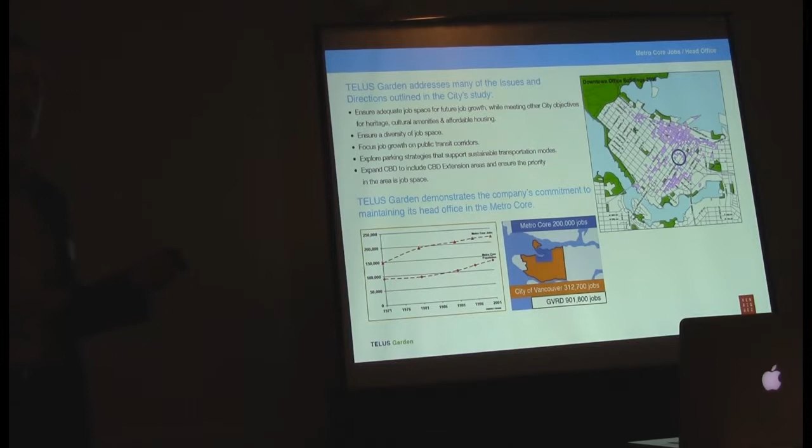This played perfectly into what was going on in the City of Vancouver at the time. The city, with all the residential development, was essentially becoming a resort town. If the scenario played on and we continued to develop residential condominiums downtown, the scenario could possibly be that we all live downtown and go to the suburbs to work. So the city recognized this, and they started to draft policies to encourage office building. There's been a lot of office building in the last little while — before that, I think the last office tower was built like 12 or 15 years earlier. So there was a wonderful opportunity.

On top of that, Telus kind of shared in the same vision that Ian had. Obviously, we're building right now, but their vision, when they recognized the importance of this site — it's an incredibly important site in the city of Vancouver on Georgia Street.

They recognized that having the two parkades and the existing Telus building was really a hole in the fabric of Vancouver. They were so excited about this that they decided not to continue their plans to move their corporate offices to Toronto, even though they'd just built a new tower in Toronto.

They decided to keep the headquarters in Vancouver because of this development, which is great because we've lost so many corporate headquarters to Calgary, Montreal, and Toronto. This was the perfect storm for the city: an underdeveloped site, corporate offices, and more office space, so the city was incredibly receptive to our proposals. A lot of things we submitted we didn't expect to get away with, and we did, just because the city was so receptive.

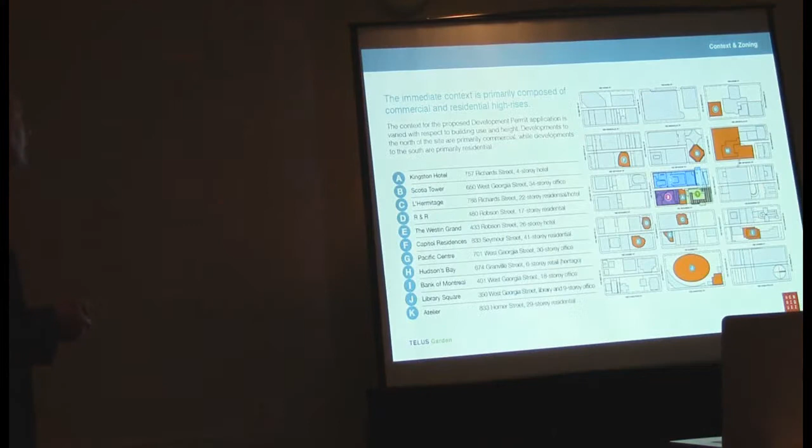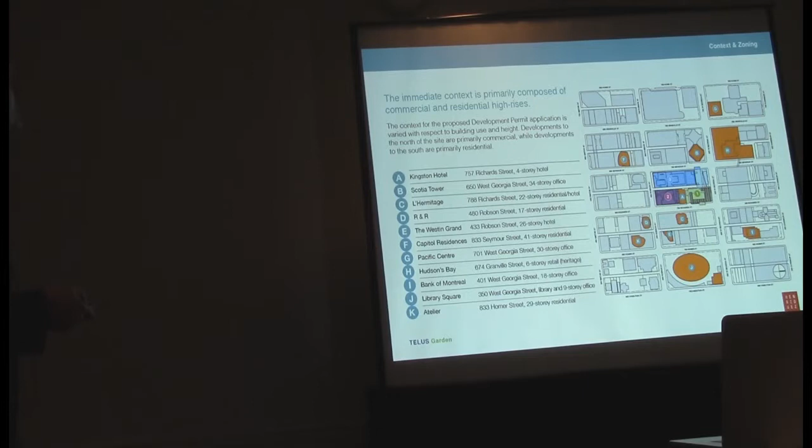Everybody knows the site, it's on Georgia Street, bounded by Seymour to the west, Richards to the east, and Robson Street to the south. It's surrounded by commercial to the northwest, the Hudson Bay, Scotia Tower, and residential development to the east. We've got the Kingston Hotel in the middle of all this — apparently beer sales have gone up during construction — and then the Hermitage opposite that, and of course the library.

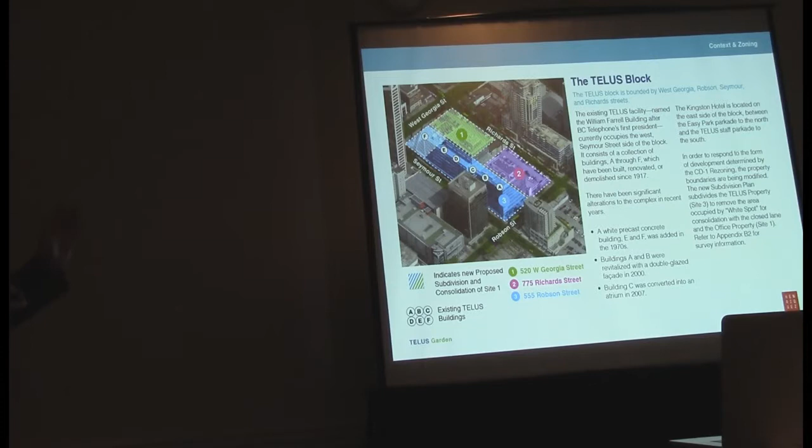The Telus site itself was what they initially wanted to develop, but Ian saw a bigger vision to develop the entire site, including the Kingston Hotel location. This is where the residential tower, the office tower, and the existing Telus building are located, and where that little sunken garden was, where I guess White Spot used to be. A lot of people are upset White Spot is gone, and I should break it to you, they're not coming back to Telus Garden — apparently Glowbal isn't quite the same.

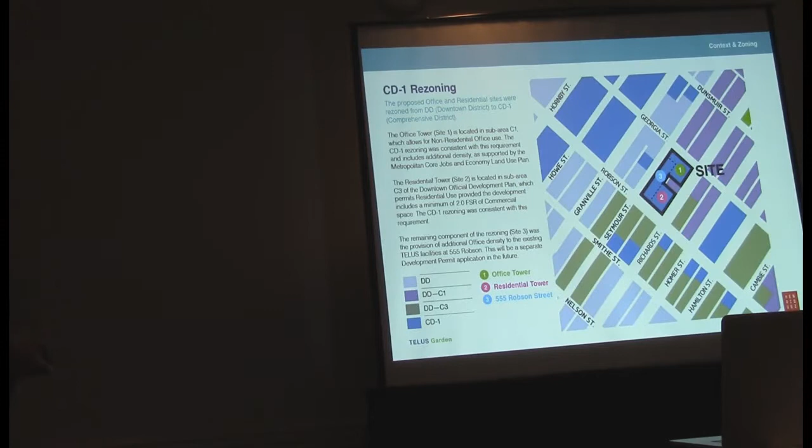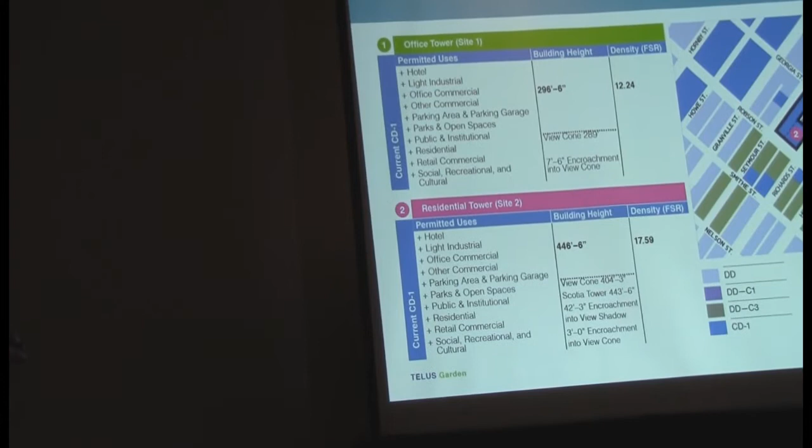On zoning, we were able to rezone this property from C1 for the office and C3 for the residential to a single CD-1, primarily to get some additional density. Like good architects for our clients, we got a density of 12.24 for the office tower and 17.59 for the residential tower, which is quite a bit of land lift. I think we did a very good job with that density.

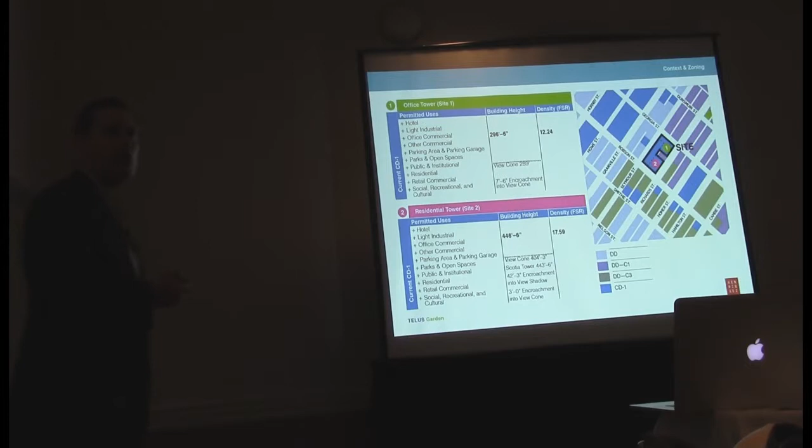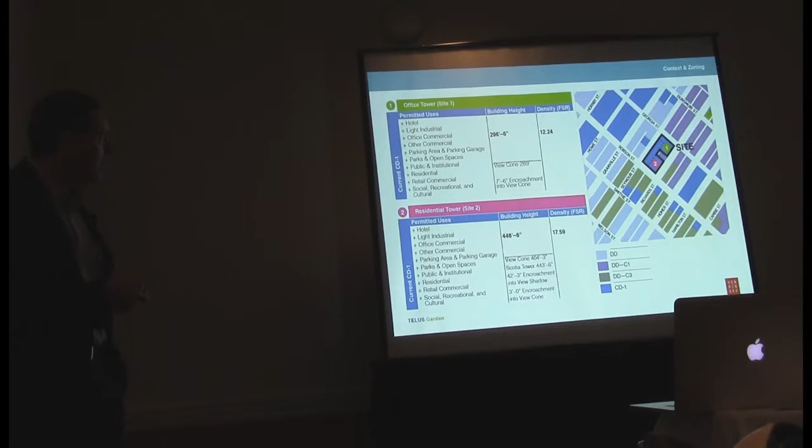The interesting story, though, isn't so much about density, because I think density fits well — it's more about the height. The office tower is capped at 300 feet, and the residential building height is about 450 feet. Under the discretion of the Director of Planning, you could build up to 450 or 500 feet in the downtown core on these sites.

But we were capped by what the city calls view cones. In 1989, City Council enacted 27 view cones, primarily from False Creek looking north over the city, to preserve views of the North Shore. These corridors cut through the building and through the city, and they control development.

With respect to the office building, view cone 9.1 — one I particularly hate of the 27 — you can see it here. There's an abstraction trying to maintain a view from Cambie Street, almost opposite City Hall, so that at that particular spot those mountain views are maintained. They're dynamic, because as you drive, you lose that view, but at that particular point it's important.

What it did was cut short a tower that could have possibly been 40 stories. It was a little frustrating because we had this corporate commitment, and we could have had a building twice the size, but we were cut halfway down because of the view cones. You can see view cone 9.1 cuts right through the center of our site, right here.

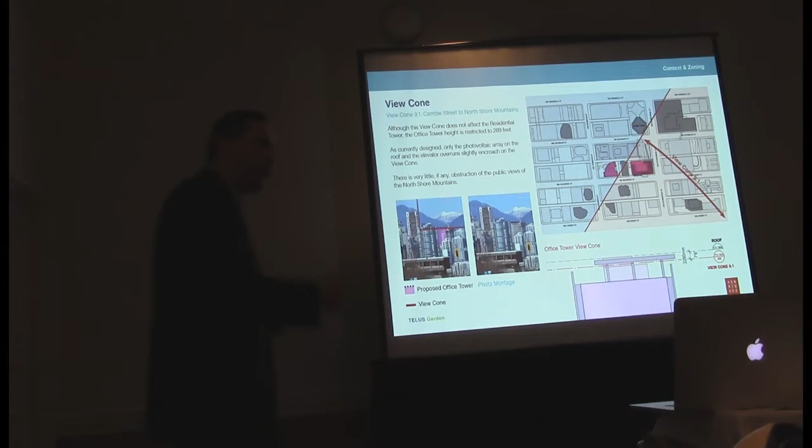You can't see it at all. We were able to actually encroach into the view cone. There is some leniency from the City of Vancouver. For Woodwards, for the W building, we were able to get a 7-foot encroachment, which was huge then. Here we got a 7'6" encroachment, so we gained 6 inches. This is huge. By the end of my career, if I can get to 7'11", I'm going to retire a happy man.

The other view cone, another one I don't like, is 9.21. You can see what it captures, the mountain view here. You can see it here cutting through our site. This is 9.1, and this is 9.21 this way.

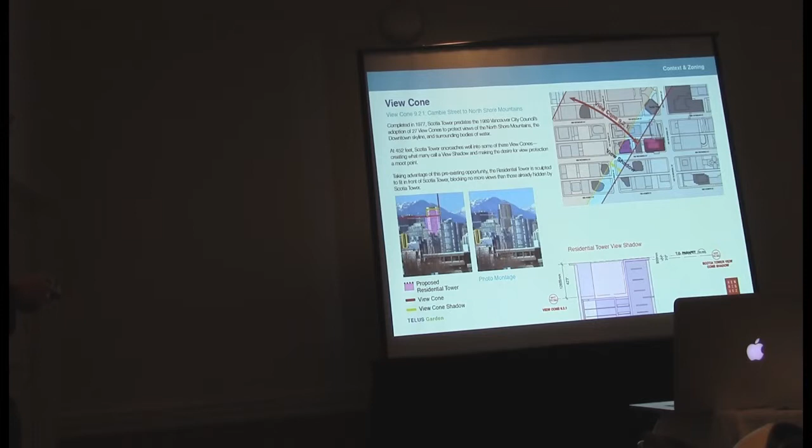The interesting thing here, and the reason why we were able to build the residential tower so much higher than the office tower, was the Scotia Tower. Thank God for the Scotia Tower. It was designed and built and completed in 1977, which predates the view cones that were enacted by council in 1989.

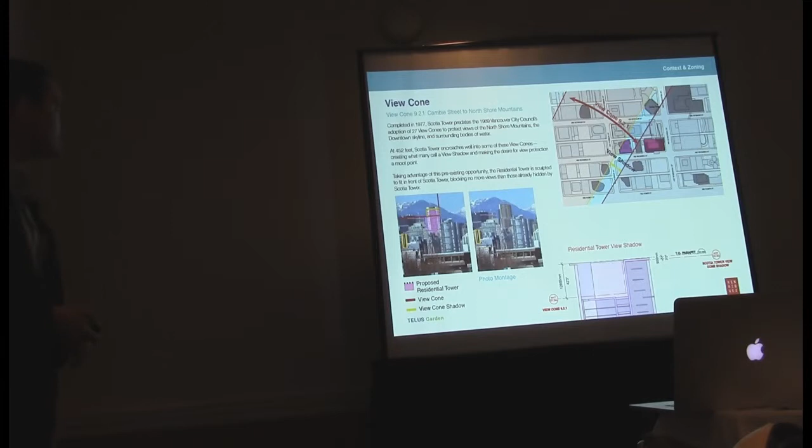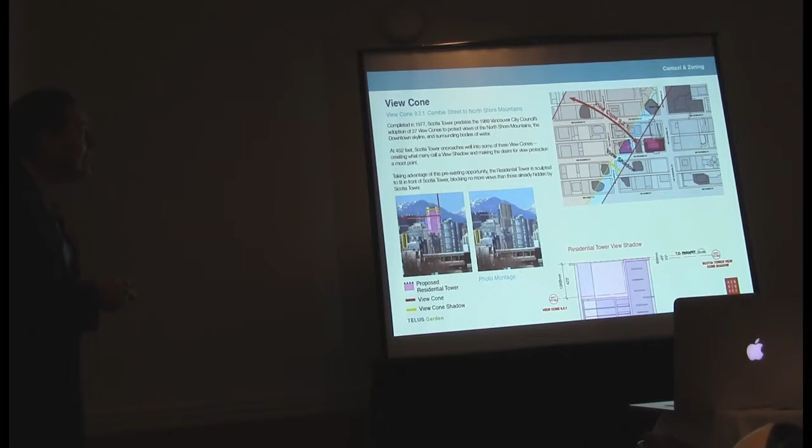We argued successfully that in no time soon would they tear down the Scotia Tower, so we argued, well, why don't we build in front of it? Seems logical, and the city accepted that. You can see it here - we're building a portion of our building that steps into the view cone, so we've cut the building off because of that, and sculpted the top of the building because of it. We were able to get a view cone encroachment of about 3 feet on this, not as successful as the other one.

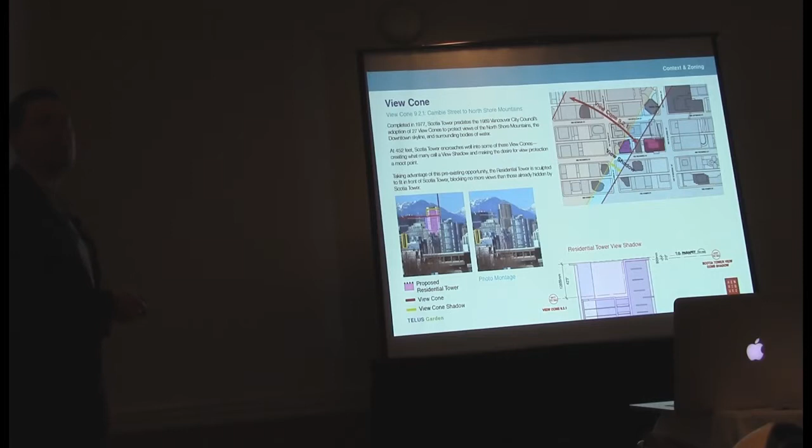Mixed use program. This big, larger vision of developing this site allowed us to actually do a number of uses on the site and really kind of rebuild this part of the city.

This is an abstraction of the residential tower and the office tower on West Georgia. The yellow is commercial, the purple is the existing Telus building. The interesting thing about the existing Telus building was, at one point, that was completely full of ladies plugging telephone lines.

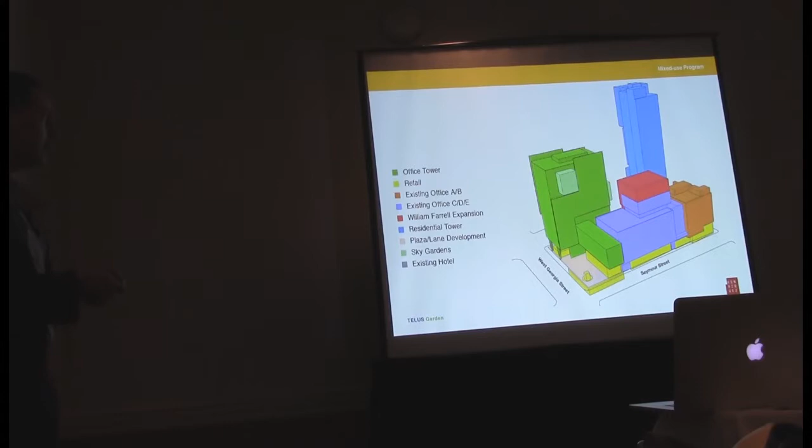Now, 300-400 people plugging things is replaced by a little computer in a closet. They've expanded that network, and it's quite huge, and there's an incredible amount of electronics now. So they've actually displaced a lot of the people who were in there. At one point, we were actually working on a data center to go on top.

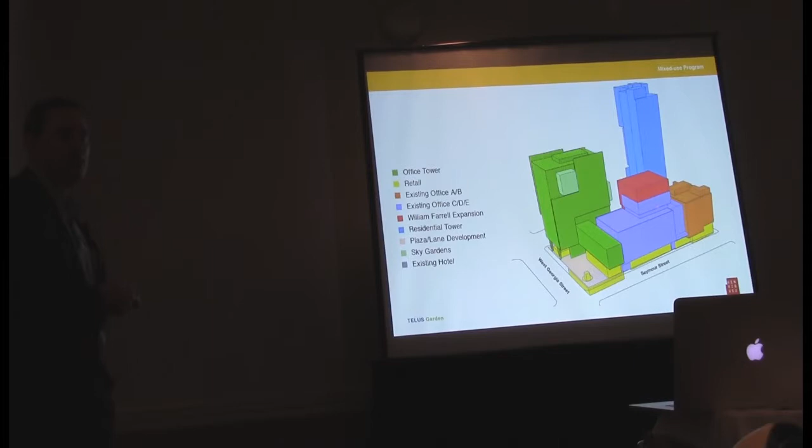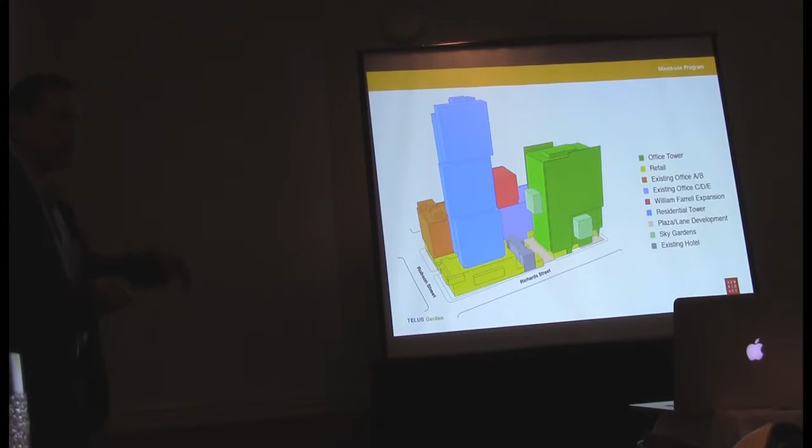Residential - you can see 555 Robson there, the data center. There's a lane outlet here. We actually closed the lane off and bought it from the city, offering this easement through instead of an encroachment. So we closed the lane off, and this is the office tower there.

Form of development. Unlike the video, which had the architect sit down in one sitting and sketch the entire idea, it's a little more complicated than that. These diagrams basically illustrate all the different forces affecting the design of a building. I'll go through them.

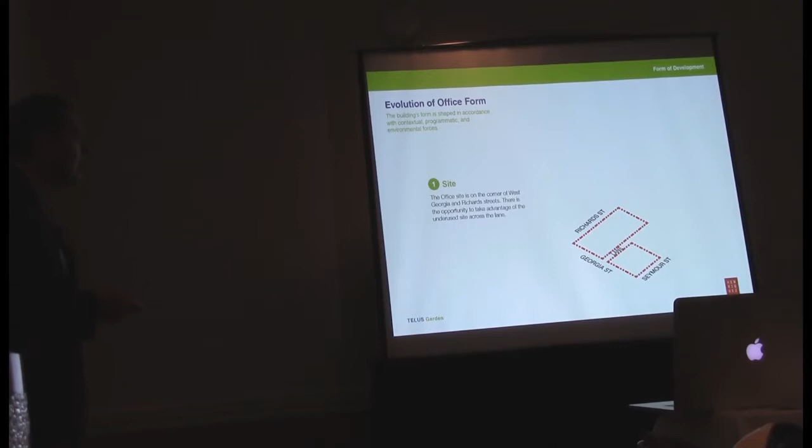Starting with the office tower and the evolution of form here, we start with the site. This was the city parkade, separated by a lane. This was that little sunken garden, that commercial area, where the white spot was. So we started with that, and we took the amount of square footage that the developer wanted in order to make this a successful development.

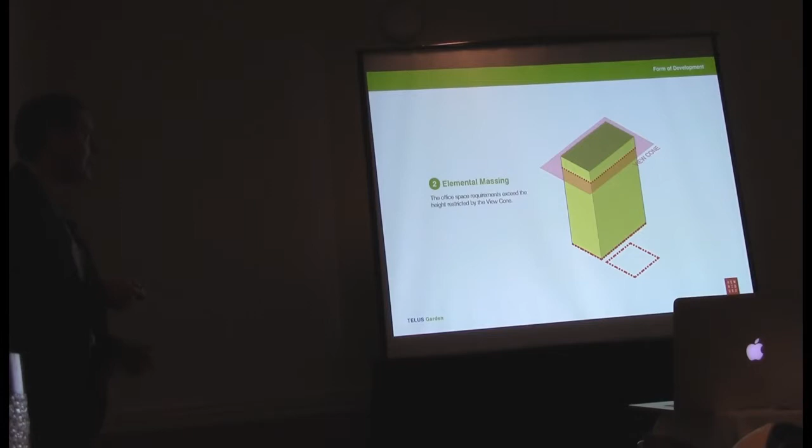You can see there we fitted it onto the site, and once again that pesky view cone cut us off, so this was not financially viable. We had to figure out what to do with this extra density, and it seemed logical that perhaps we take that density and transfer it to the other side. But we're left with a shorter tower, and in some respects we've got this orphaned piece of density - frankly, a little building there on Vancouver's most ceremonial street wasn't the right solution.

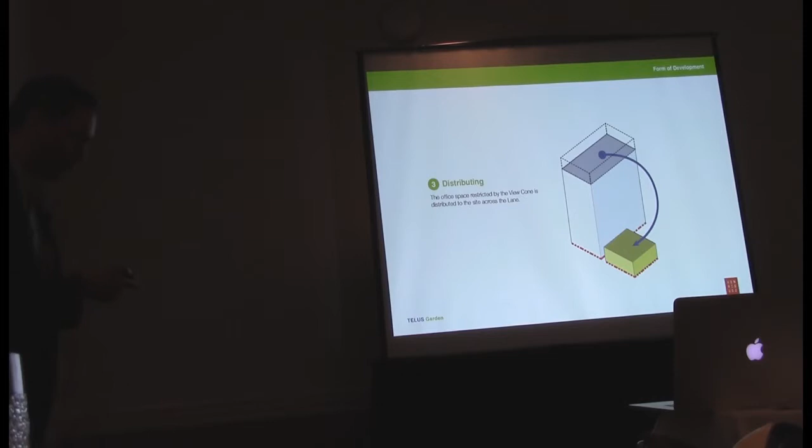So we said, well, what can we do now? Why don't we bridge across, pull this thing up and through, bridge over the lane. We can connect the new Telus building with the old Telus building, so bridge the two.

Because the density was greater, we proposed to cantilever since we were running out of room. We proposed going over the property line, arguing that the view cones they wanted us to respect actually cut into the building. This is a corporate head office, and it should have more presence in the city of Vancouver. So we proposed that this presence would be seen on the street rather than up in the skyline. The city actually accepted that rationale—they were very receptive to this development.

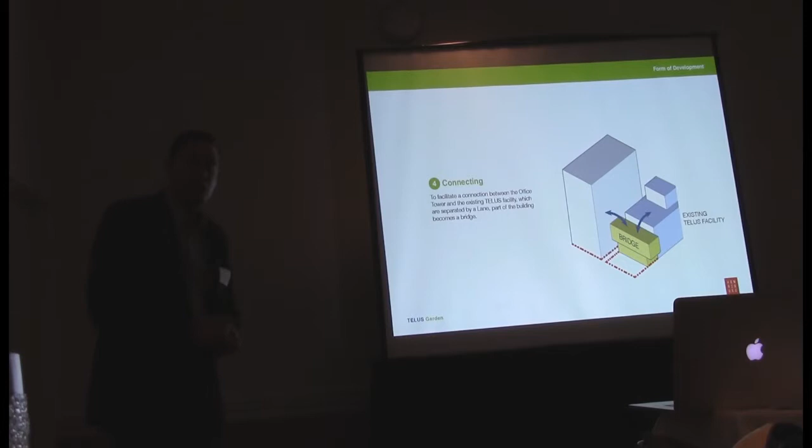We were able to cantilever over the street by 25 feet, on Seymour and on Richards. So you'll be able to drive your car underneath this building. This is nothing new—think about Erickson's courthouses, there are developments not only in Vancouver that have done this. It's not new, but for the city to accept this now was revolutionary for us. We still can't believe it, we're still pinching ourselves that they would allow us to do this. It's pretty radical for the city of Vancouver.

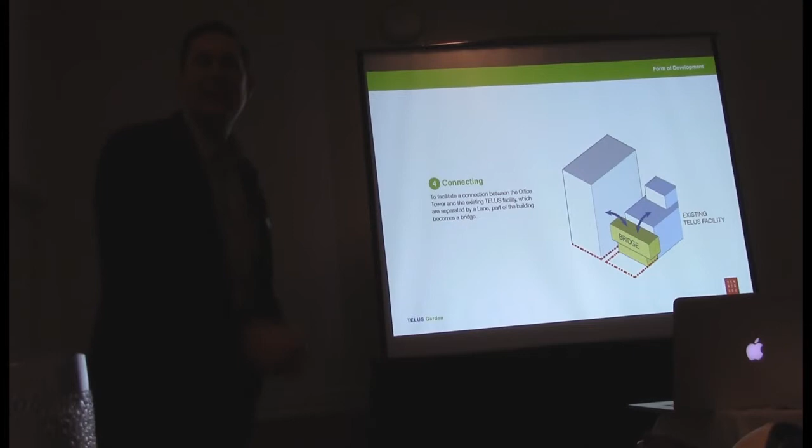Every time we go back and talk to the planners now, we come into their offices and every new development being submitted is asking to cantilever over the property line. Every development—they just hate us up there.

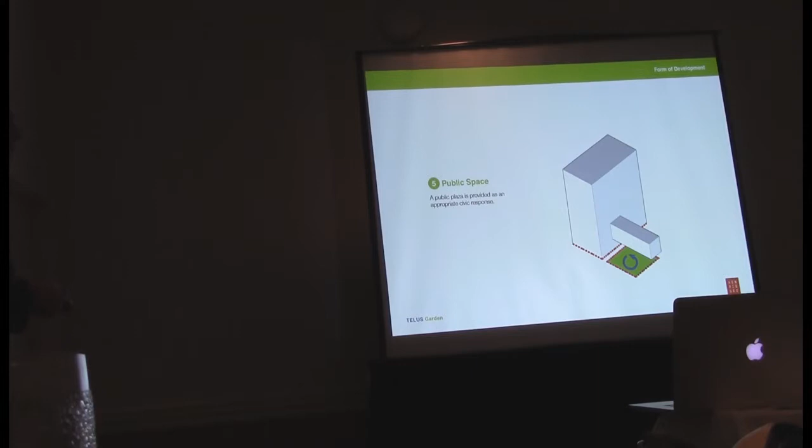By pulling this bridge up, we're actually allowed to have a plaza there that we can use for more ceremonial spaces because of Georgia Street. The other thing is we had this notion of having public, semi-public spaces occupying all the roofs, which is a crazy notion for an office tower, that people can actually go out and utilize roof space.

Even though in emergencies you can drive through the lane—there are some bollards that are removable—we needed a gesture to link this orphan site with the other. We came up with the idea of a pavilion with an arch, with the arch at the highest point where the lane is so an emergency vehicle can get through. On the plaza side, that becomes a covered area—it does rain in Vancouver, so we thought that was a good idea. Then it transfers into the lobby of the Telus building, almost a seamless integration of inside and outside.

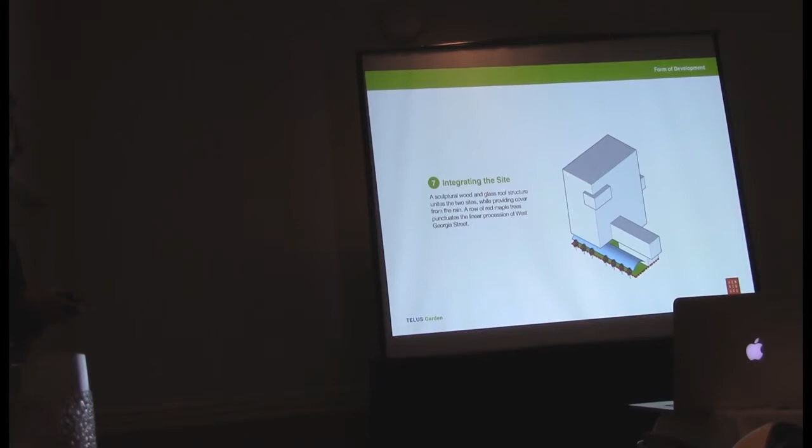We came up with this notion, still working on it, of integrating the entire block. One of the more interesting things is this lane—I always say it's the prettiest lane in Vancouver. Kind of a weird thing to say, but it has no power poles, because all the copper in the province comes into the existing Telus building here, and it comes down the lane.

I don't know if anybody drove by the site and saw that big bridge holding up something—that was all the copper in the province coming into the site. They constructed it and put it onto a steel bridge, holding it in the air because it was once running down the lane. Literally, that was all the copper going into the mainframe at Telus.

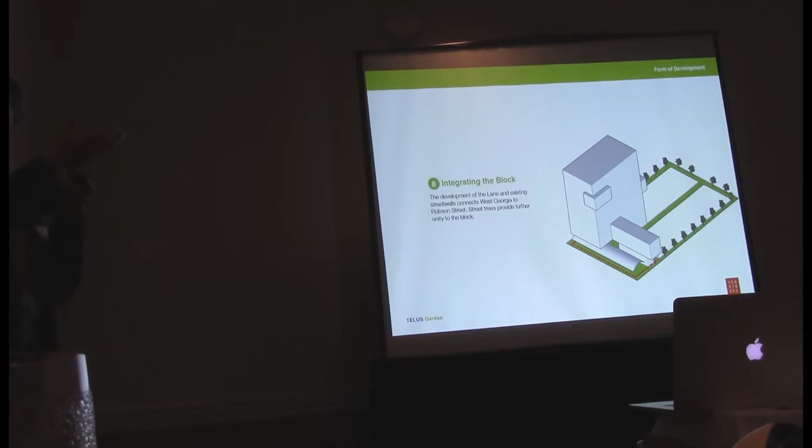That was all military, all police, CSIS—all running through there. There were guys on call 24/7 because if the bridge deflected a little, the lines would go down, and crews would descend upon that. Thank God, it made for a lot of sleepless nights for risk assessors at Telus. Nothing happened—we held it up in the air, built underneath it, and then put it back again. So thank God that was safe.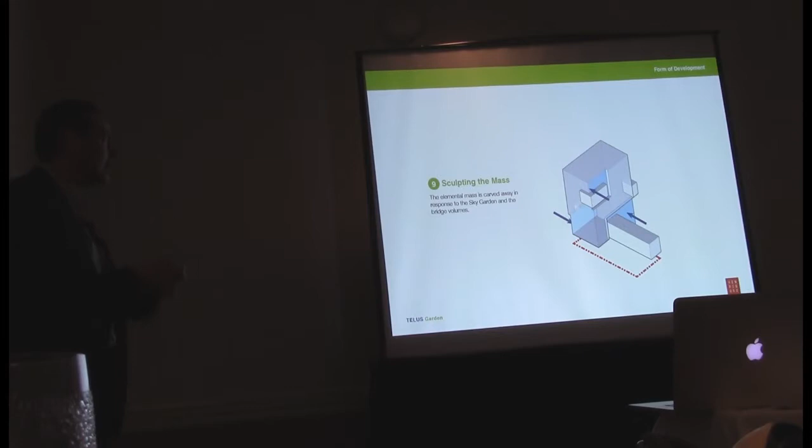Then we had the simple mass. We started to sculpt it a little by pushing and pulling, creating what we call sky gardens, which animate the facade. Then we start to articulate the skins—you'll see this a bit later. That's it there, a simplified schematic rendering: the sky balconies, the photovoltaics at the top, the skin I was talking about, the bar, the pass-through, the pavilion, the lobby, a water feature, a sunken garden here, a water feature there.

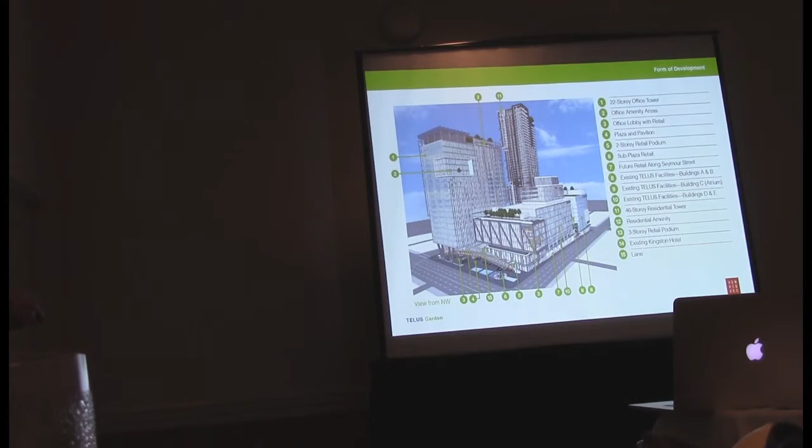Kind of really interesting—same thing with the evolution of residential form. It started, like all good projects, with a site. This is on Richards and Robson.

We essentially started with a pretty typical typology in Vancouver, which is a podium, tower on a podium, and we moved it away from Robson Street because that's our pedestrian street, and we didn't want a huge 47-story tower hovering over it. So we moved it back.

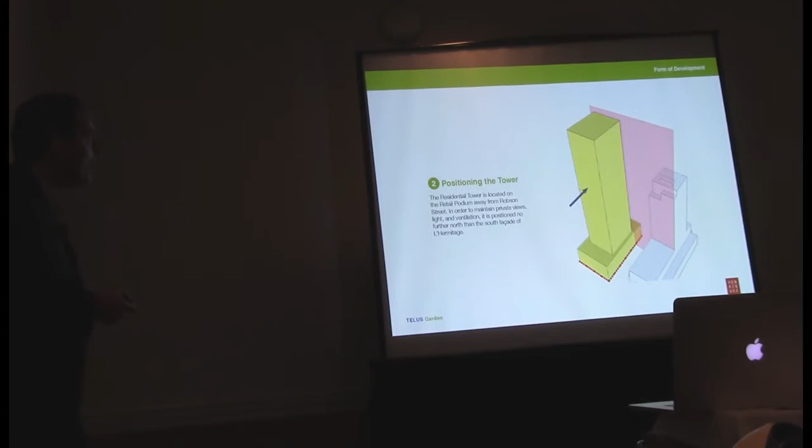We moved it back to an arbitrary line, the edge of the Hermitage, because we wanted to maintain the private views of the people living there. Then there's the view cone, 9.21. You can see the view shadow for the Scotia Tower, and we had to cut a portion of the building, which sculpted the top.

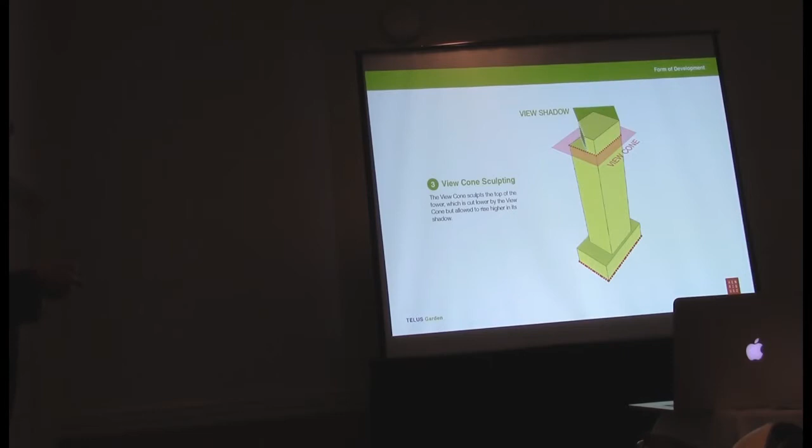Then, since it's quite a big tower, we actually broke it into 3 parts. We had a west bar and an east bar, and we shifted those, creating this interstitial space.

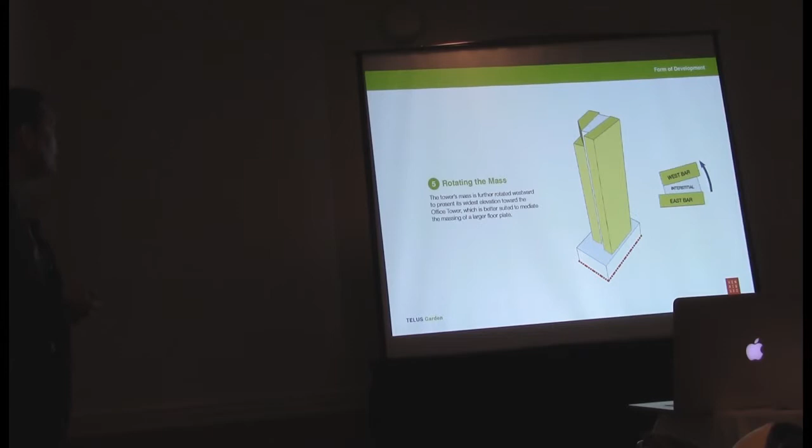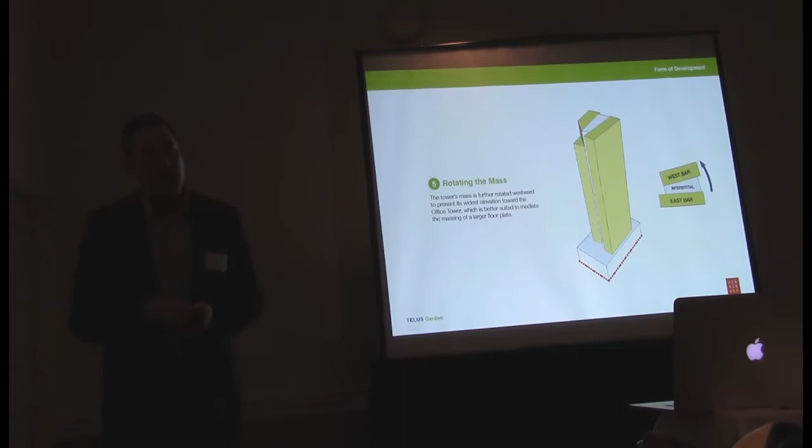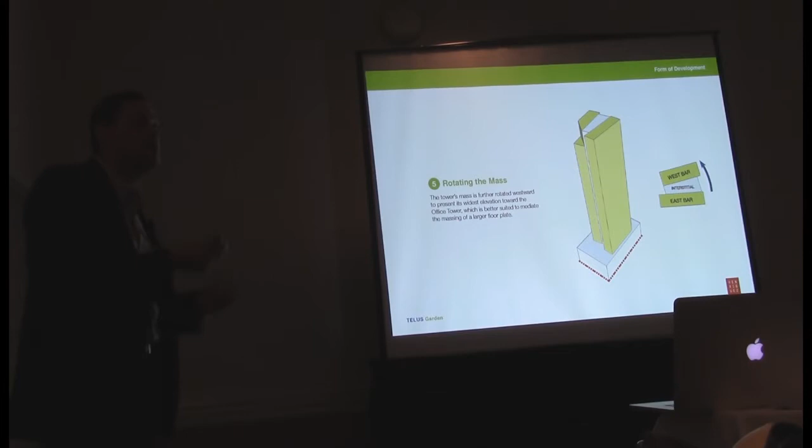Then we started to think about this - it was quite a big floor plate, pushing around 9,000 square feet. So we wanted to present a thin face towards the residential development to the south and a wider face to the commercial development to the north. We did that because residential towers are anywhere from 6,000 to 8,000 square feet per floor plate, versus a commercial office tower, which is more like 20,000. So we made it thin towards the residential buildings and fat towards the office uses.

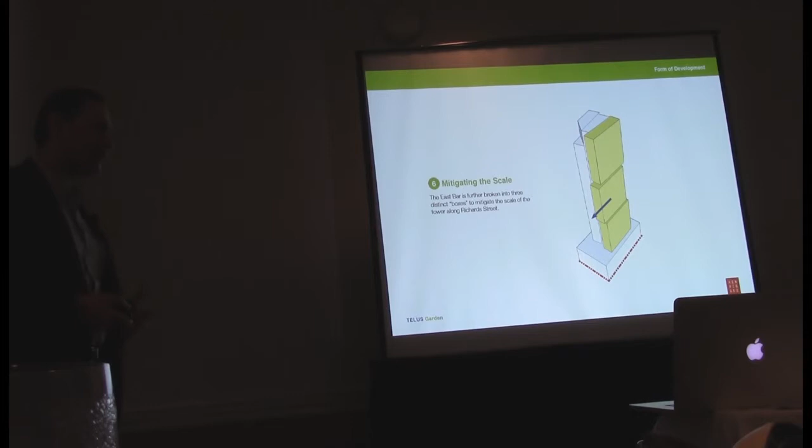From there, we felt that on Richards Street, we had to do something with that face of the building. We didn't really care about the lane too much, but we cared about this. So we broke it into 3 different boxes to scale it down a bit, since it is 46 stories tall.

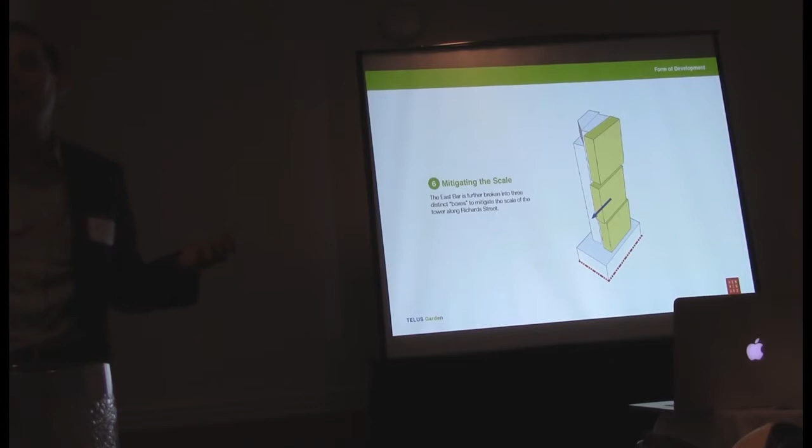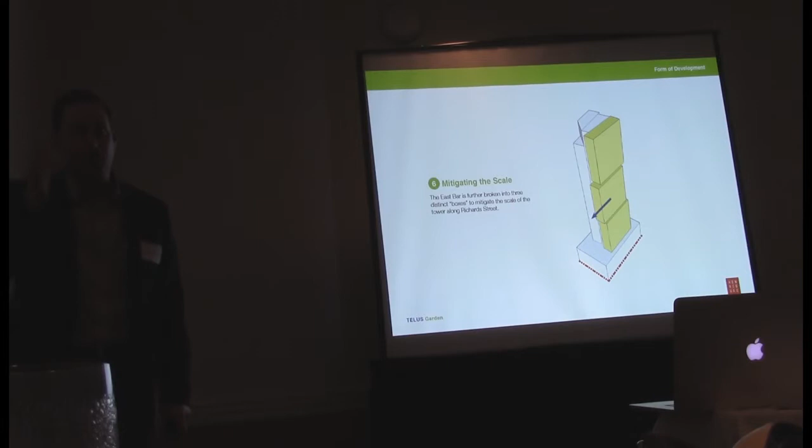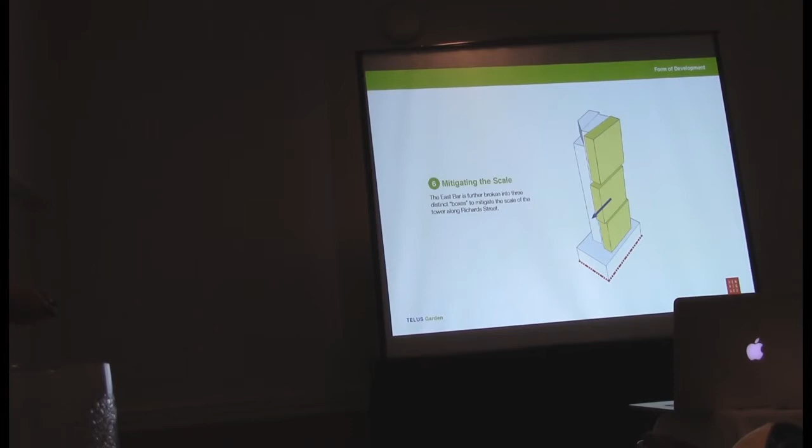Then, stupidly, taking cues from the office building, we liked to cantilever 25 feet - it was in our vocabulary. So we actually cantilevered the mid box 25 feet. For those of you in the industry, taking units that come down, plumbing, structure, going off in the middle - not a good thing, not a smart thing - but we actually made it work, believe it or not. We'll see. Eternally optimistic.

Setbacks - the city also had notions of setting back Richards Street and Robson Street to allow a bit more room for pedestrians. We set it all back for that. We set some back for the Kingston Hotel to respect it, and we did some ventilation there.

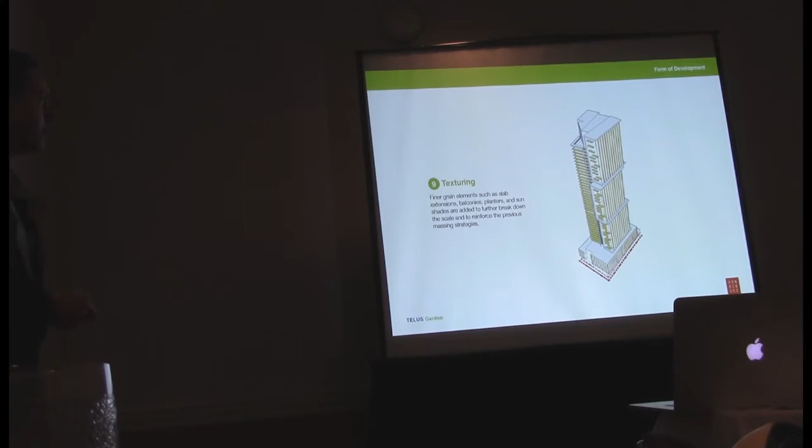Then we started to sculpt the bottom to demarcate wayfinding into the office lobby and the residential lobby. We textured the facades with some solar shading and decks to break it down to a more human scale - once again, it's 46 stories. You can see the cantilever decks, interstitial spaces, the west bar, the podium, and so forth.

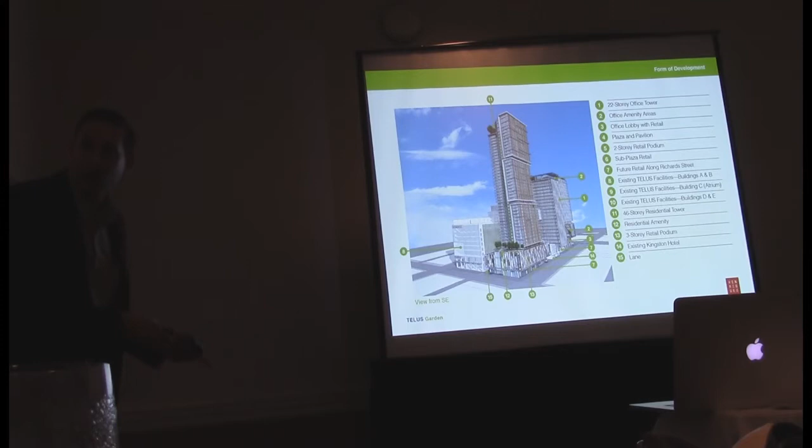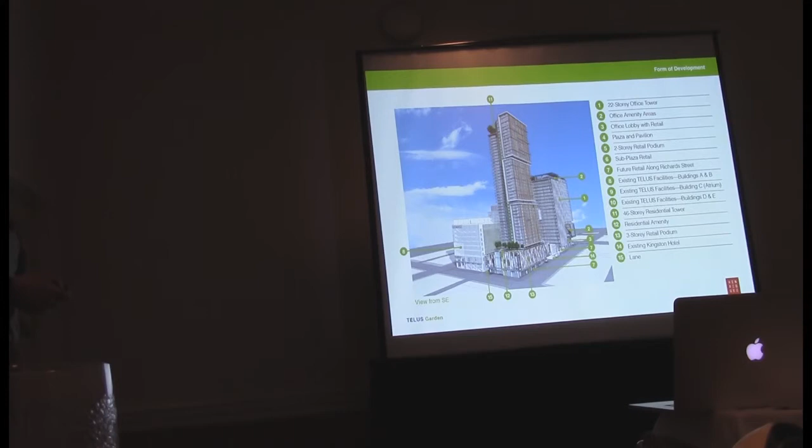Some of this has actually changed - we have modified some of the design. I do have slides of more recent design work, because believe it or not, we are continuously designing things. We have a relationship with Westbank that when we design something, if it costs too much, we go back to the drawing boards. Wonderful concept, but when you're under construction, we're always trying to keep up with it and stay on top of permitting and building permits. Sometimes we build or design things twice, and it's been quite challenging, let's say.

Sustainability and central plant. Telus always says the future is friendly, and I think they really had to believe in that, because we rezoned this to CD1 - in Vancouver, rezonings require LEED Gold. Telus said, no, that's not good enough, we want to do LEED Platinum. So the office tower is LEED Platinum, which is a commitment from both Westbank and Telus to sustainability in the environment.

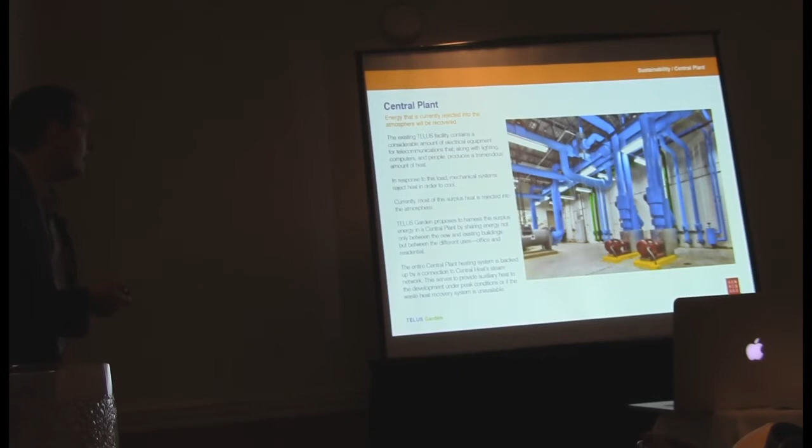At the heart of our sustainability strategy is the central plant. As I said, the existing Telus building is essentially full of telecommunications equipment, and that equipment is constantly pumping out heat. So in order to cool it, you have to cool this equipment, or we drop all our calls essentially. So the cooling is always running, and when you cool in mechanical terms, you reject heat. It seems so simple, but you cool by rejecting heat.

That rejected heat currently dissipates into the environment. They just dissipate and reject it into the environment.

So at the basis of what we were doing in this new development, and it's really good as part of Ian's vision, is there's this whole vision for this block rather than an isolated thing. We really look at this as a block of buildings that are connected rather than individual buildings. We actually use this low-grade energy to heat both the office tower and residential tower. Even the rejected heat here we can use in the residential tower. So we're always exchanging energy between the buildings.

This term low-grade energy is interesting in that it's energy that, or you could call it temperature, that's not too hot, not too cold. You need a particular type of heating and cooling technology to actually build upon that.

We are actually using a product out of Belgium called a Clima Canal by Jaga, which is essentially, for lack of a better term, like a hot water baseboard. The interesting thing about that, we're using it to heat and cool the residential tower and to heat and cool the perimeter of the office tower.

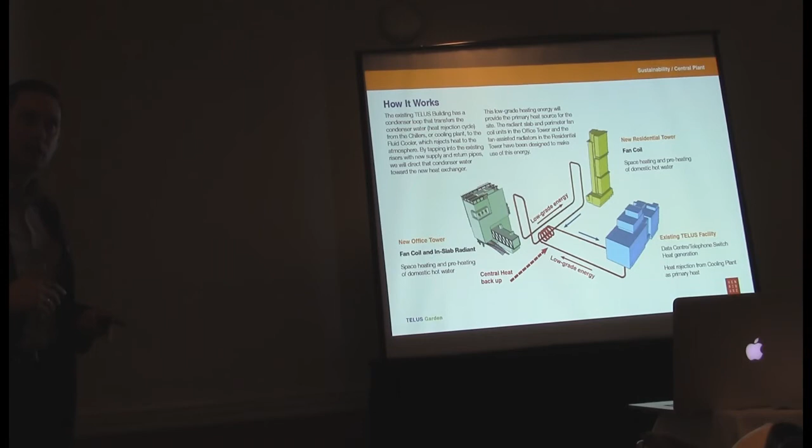The interesting thing here is that we were able to look at the office building, and typical office buildings are like 13 feet floor to floor. Because we weren't using air to heat and cool, we thought, why don't we compress everything? And we were able to get it down to 12'6" floor to floor. By doing that, we got an extra floor because we didn't have enough height, since we were contained by that view cone. So we actually used this technology, which would be a healthier, more comfortable office environment, to our advantage. And in fact, we got a free floor out of it, which makes developers very happy.

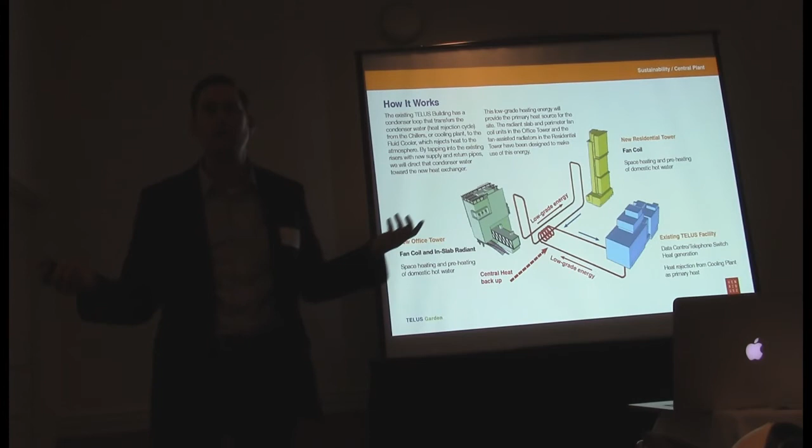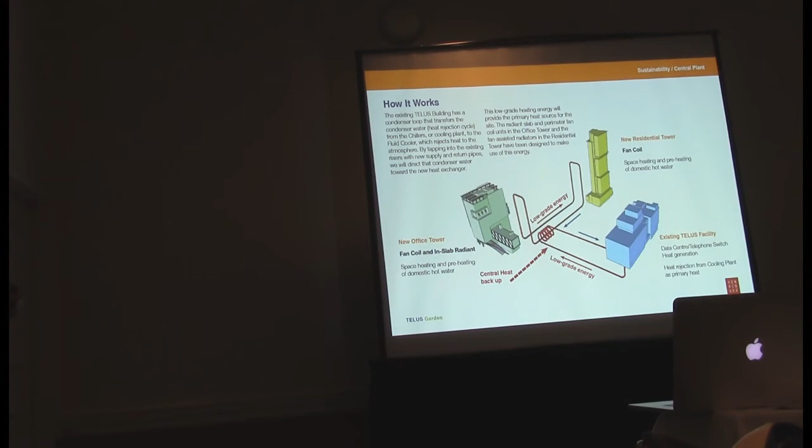Because we're not using forced air in different zones and trying to balance everything, we're just pumping ventilation air, we're able to use old-fashioned operable windows. If you're hot or cold in your office, you open the window. We're kind of going back old school, using infloor radiant heating like the Romans used and operable windows that were traditionally used. So some of these things are very advanced but very simple. We're actually going forward and going back at the same time.

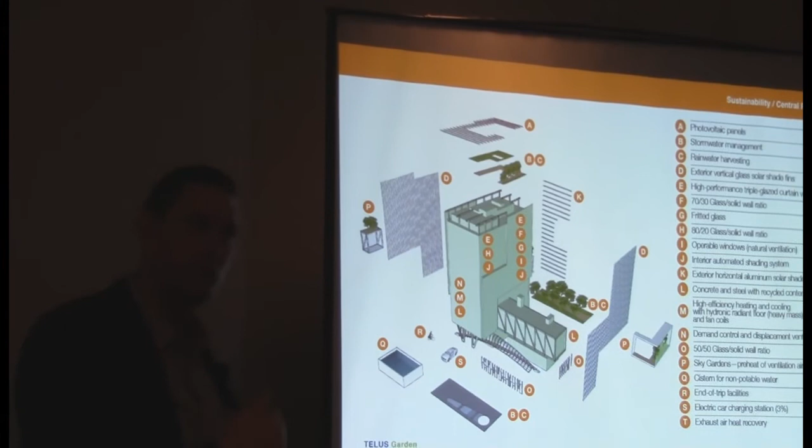Going through the other sustainability features, photovoltaics. We have this huge photovoltaic array on top of the building, and for us it was symbolic of sustainability. We really felt you had to see it. Everybody looks at triple glazing and doesn't recognize it as high performance glazing, but everybody knows what photovoltaics are. It actually floats across the top and cantilevers slightly over the building, so it's quite visible from the street. It's really our commitment to sustainability.

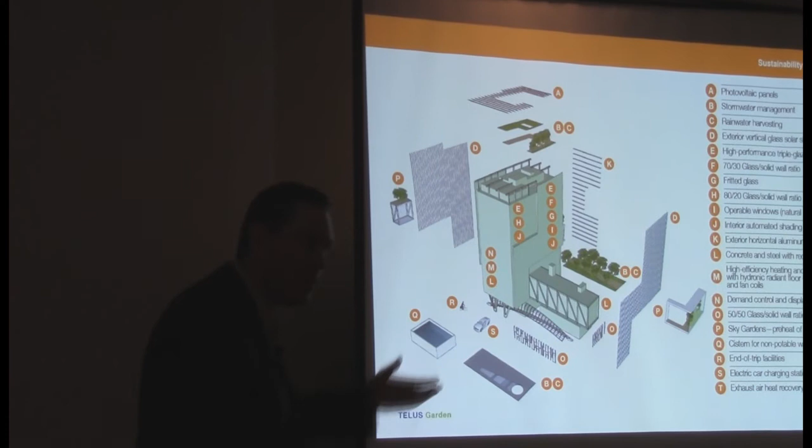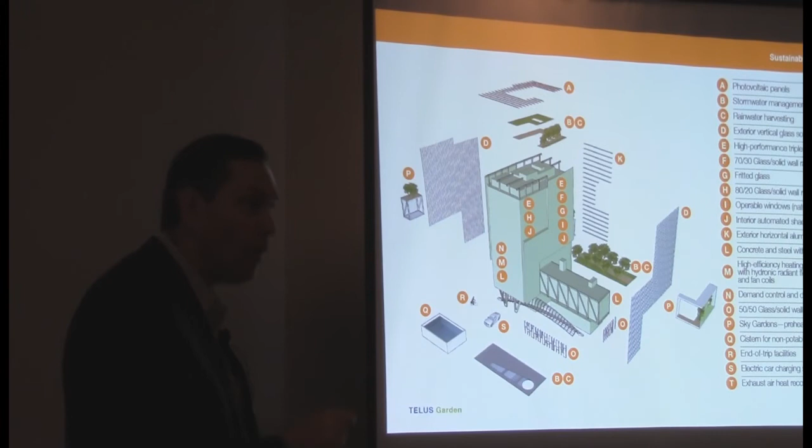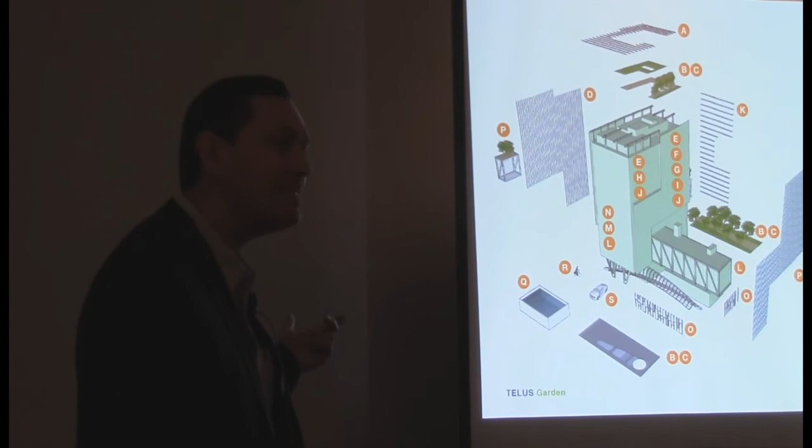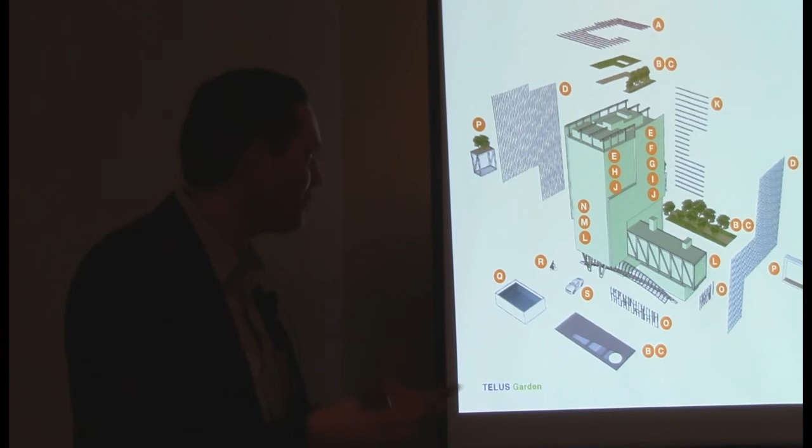A really cool thing here, going back to those synergies, is that we use the photovoltaics to capture energy for electricity, but we also use that surface to capture water. Every bit of water that falls on the photovoltaic drains off, collects in a gutter, drains down into a cistern. We collect it there along with water from various roofs throughout the building, and we use that for gray water, irrigation, and even for a redundant fire system, since we have all this exposed steel. Our code consultant was really excited about this incredible synergy.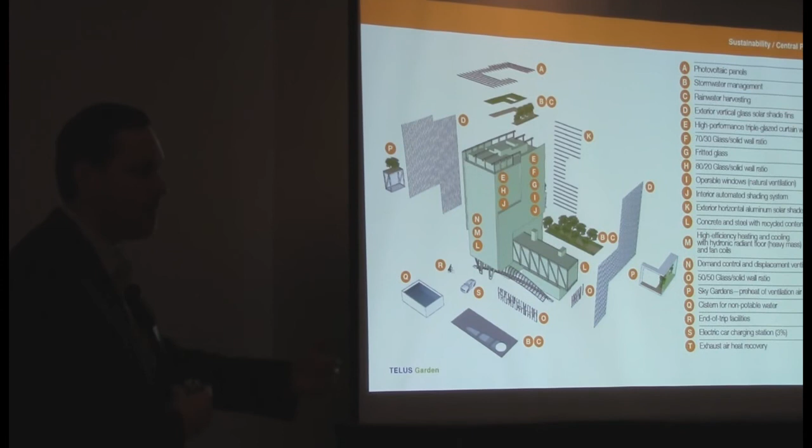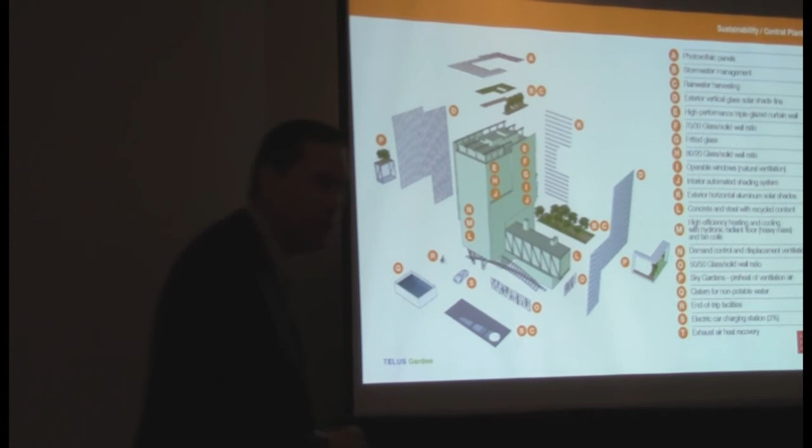For stormwater management, and as I said with the triple glazing, you can see elements for passive solar shading. On the south facade we have 5-foot cantilevered sunshades. On the east and west facades we have 16-inch glass fins cantilevered off the building. The combined cooling we get is about 5 to 7% a year. That doesn't sound like a lot, but if you're an office tower cooling all the time, it certainly adds up.

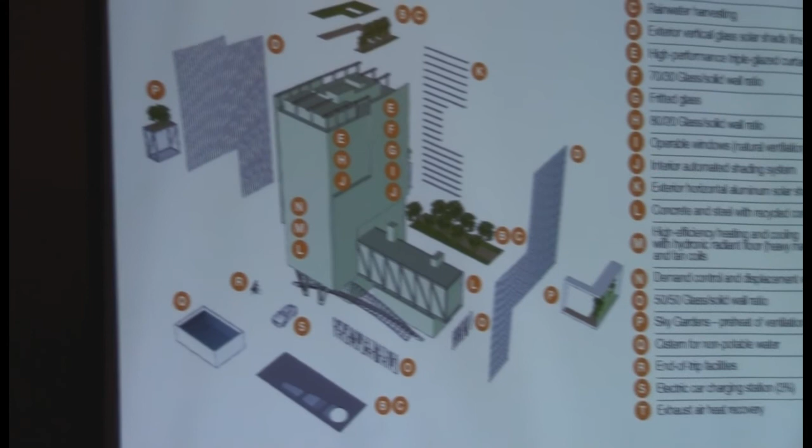We also have operable windows and fritted glass - if you drive by you can see some of that fritted glass, which helps a little bit. Then there are the sky gardens and end-of-trip facilities: electric car charging, exhaust heat recovery, similar to what I talked about with ventilation. It's very similar in our residential tower, where we use every roof we can, and they're occupied, with stormwater management and rainwater harvesting.

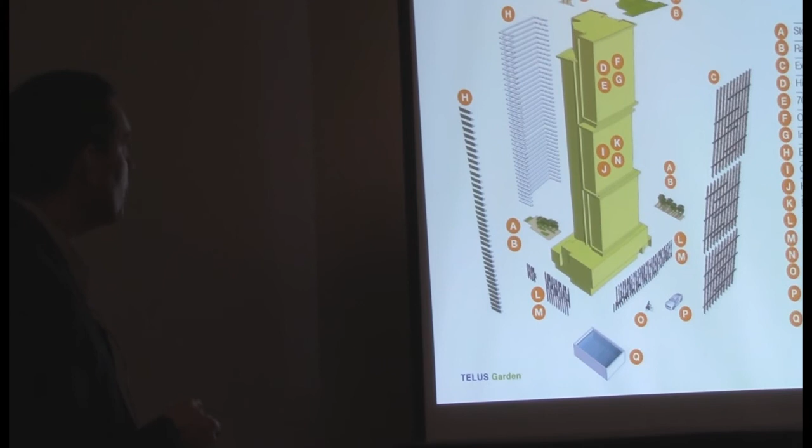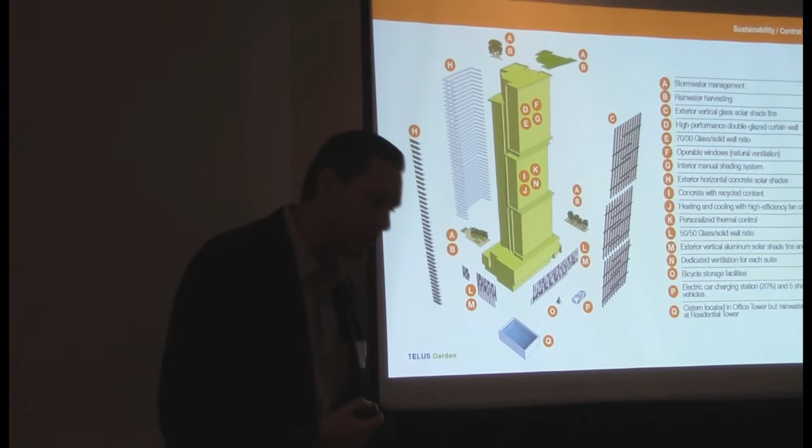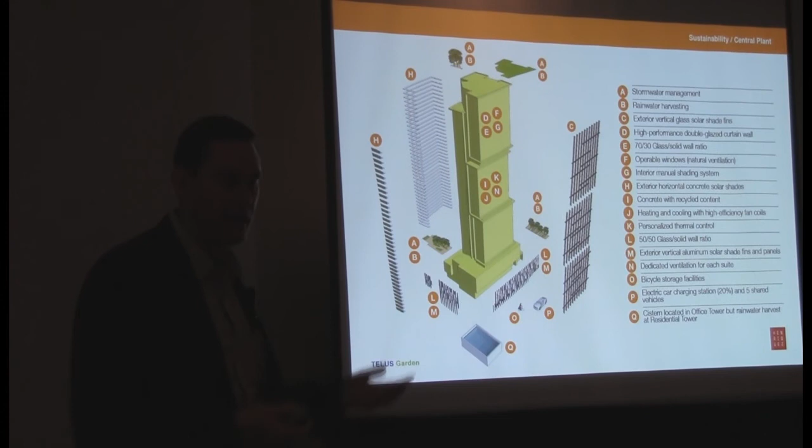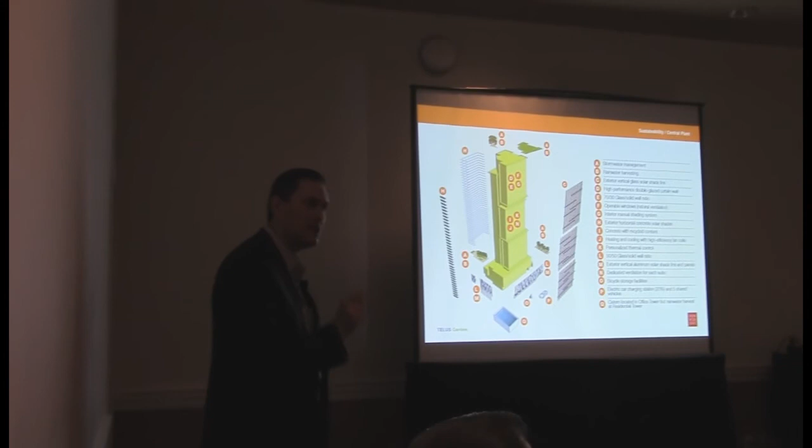We have similar fins on the residential tower, actually even bigger - almost 2.5 feet out, cantilevered from the glazing. This was the first time we worked with offshore curtain wall companies. Traditionally in Canada or the US we'd go with a company, open up a book, and size it. Here we worked with offshore companies doing literally custom dies for every window, which for me reviewing shop drawings meant thinking about every single gasket. But it gave us this incredible opportunity to add these elements to the facade that helped save energy.

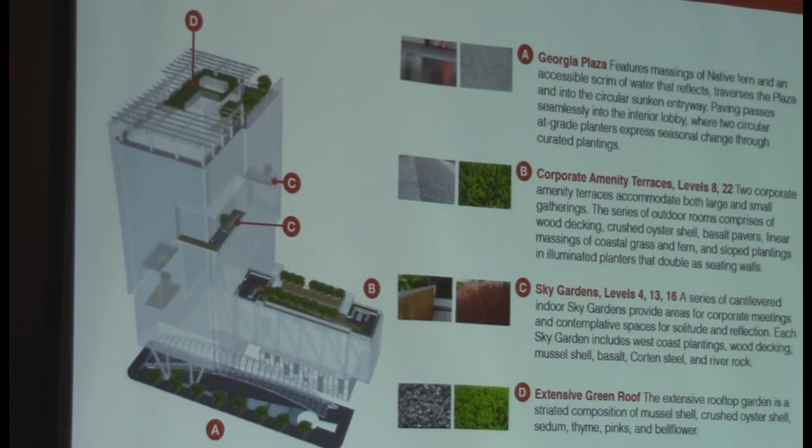Landscape - it's called Telus Garden. As I alluded to before, we have trees and gardens all over. This is just a quick view of the office tower. We use a lot of indigenous plants and indigenous materials as part of the landscaping.

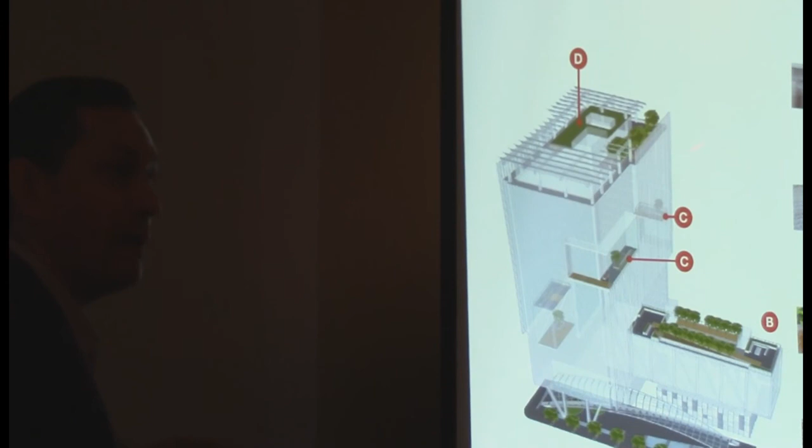This is the executive floor - I really want to go there. Apparently there's a huge wine cellar and so forth. I really want to be there; if I was doing it all over again, I'd be a Telus executive.

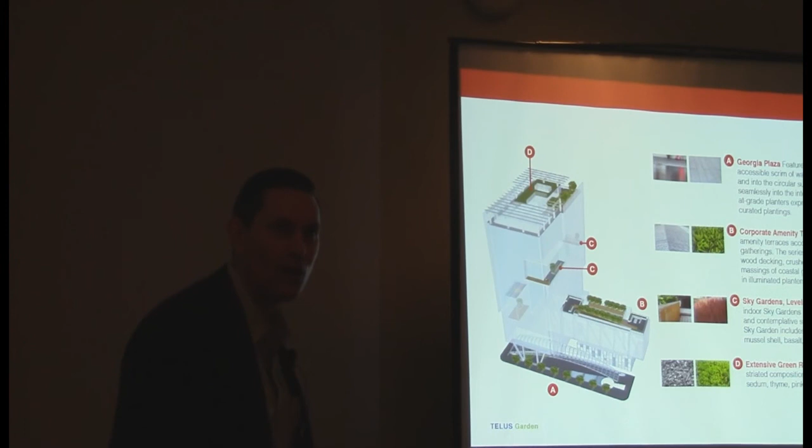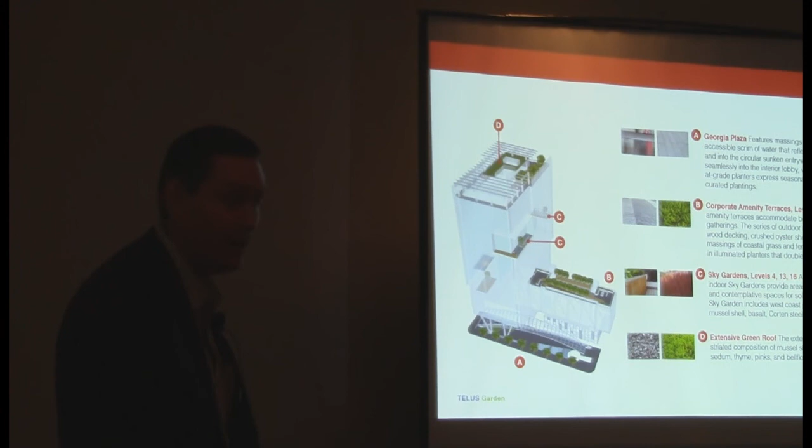Beautiful, they're using all the space. There's a whole bunch of Japanese gardens up there, bars and so forth, for the Telus employees. There are outdoor kitchens, walkways, and fire pits with biofuels. The sky gardens themselves will also have some vegetation.